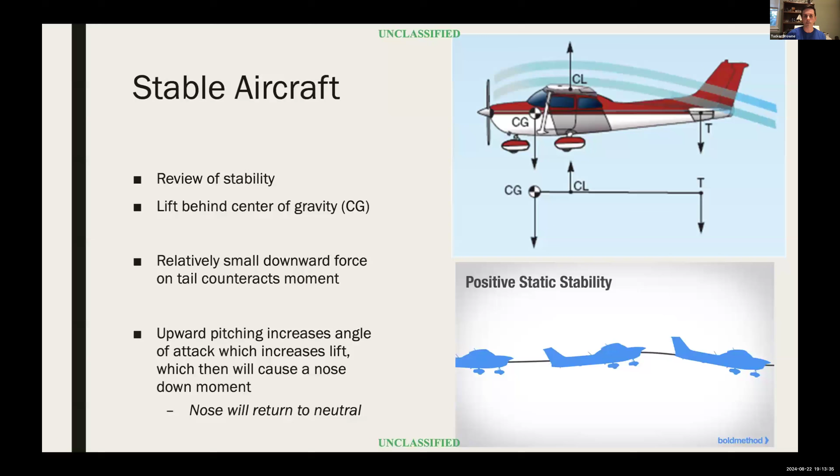That is not the case for a fighter. In most fighters, lift is forward of the center of gravity. So now when you increase the angle of attack, it increases lift and causes a further nose pitching up moment. It's unstable. So you have to have digital flight controls to counteract this to reduce pilot workload. If the pilot wasn't actively fighting this the whole time, and sometimes it's even impossible due to considerations like pilot-induced oscillations, the airplane just wouldn't be able to fly.

So the F-16 was one of the first unstable airplanes that was actually operationalized. An interesting tidbit: I often hear people say the F-16 was made unstable for maneuverability purposes. And while maneuverability does actually increase somewhat due to instability like this in pitch, it actually wasn't why it was first designed or implemented. It's because of the tail force.

And the thing that you'll notice that's different there is that as opposed to a stable aircraft where the tail force provides a down force to counteract lift, in an unstable aircraft, you can have the wings and the horizontal tails provide an upward force, which means now you have more ability to have lift, which increases performance because you need to fly at a lower angle of attack.

So initially it was made literally to increase the range of the F-16. They said, oh, this is actually really great for maneuverability too. But I didn't know that until I got to test pilot school. I always thought the F-16 was designed to be unstable. And then some of the original F-16 testers told me that. So I thought that was pretty interesting.

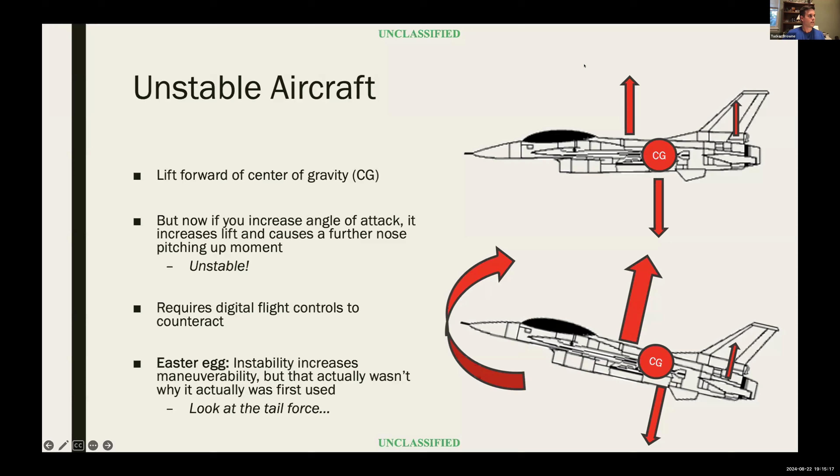So what you have to do when you have an unstable aircraft is you have to do some sort of fly-by-wire or digital flight control system. And essentially what that does is it gives you a flight control computer that talks to actuators to automatically actuate your control surfaces. So most advanced fighters, most of which are inherently unstable, which there's exceptions to that. For example, the F-15 is actually a stable aircraft. But for inherently unstable aircraft, they require flight control computers to make the workload reasonable.

So one of the things that happens there is it gets rid of feedback. So now I am just giving a vote to the computer as to what I want to do, but it allows for much quicker flight control responses, and it allows for some cool things in that now if I just pull back on the stick, it doesn't necessarily just directly connect to an elevator the way that it would in a Cessna or some sort of small pulley driven airplane. It can do a combination of different flight controls.

And also another misconception I had, at least coming into test pilot school, is that, hey, if an aircraft's unstable, that means it's uncontrollable, and that you'll just go out of control. There's no way for a pilot to fly an unstable airplane. One of the coolest things I got to do in test pilot school, I got to fly the X-62 VISTA, which is a specially designed F-16 that allows it to basically modify the flying qualities of aircraft. And I also got to fly in a specially modified Learjet run by Calspan that does that too.

And one of the things they did, they added a pitch instability into it. So now as the nose starts coming up, it actually keeps going up. And as the nose comes down, it keeps going down. And I thought this is going to be pretty difficult to fly. It turns out it just takes a fair amount of pilot workload. You can fly an unstable airplane, which I had no idea that you could control it.

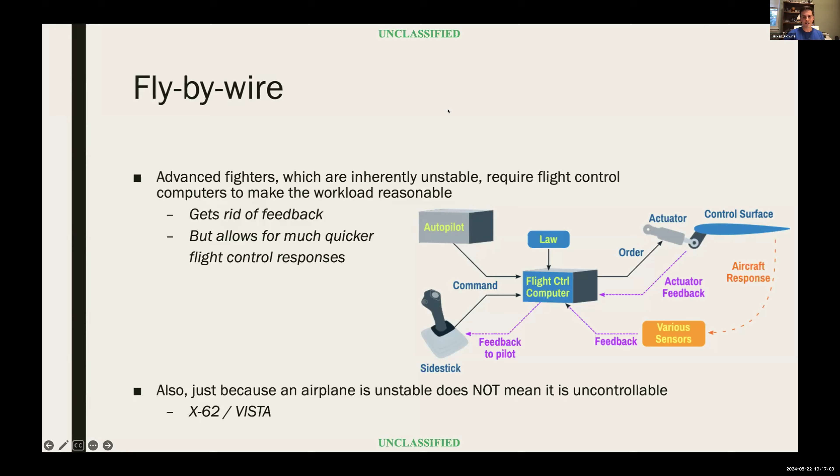But you can. So the traditional kind of flight controls in stable aircraft, sometimes you might see reversible flight controls, i.e. pulley sort of systems. So airplanes like Cessnas have these reversible flight controls where you move the stick and the flight controls move. You move the flight controls and actually the stick moves as well. That means you have to consider other factors into flying qualities and handling qualities, such as wind, speed, aircraft loading, buffet, because now you're going to feel those forces on your control stick and it's going to affect your ability to fly the aircraft.

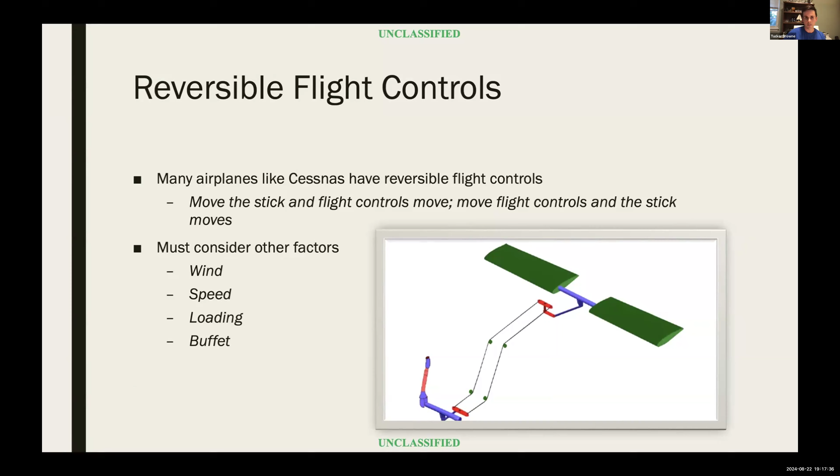So a couple differences between what we've seen here. So for some basic flight control differences, in a reversible flight control system that doesn't have a digital flight control computer, the faster you go, the more sensitive flight controls can be, and the higher control forces required. And that is okay for things that operate essentially from 50 knots up to maybe 150 knots, where the relative forces on the control surfaces are not that different. It's not okay when you're going Mach 2 or you're pulling 9 Gs.

And in those cases, you actually need the ability to have some sort of boost system in there, and irreversible flight controls help a lot. And the way that we do it in modern fighters nowadays are hydraulically assisted actuators. So the F-22 has a very, very strong hydraulic system with a ton of redundancy, because if this goes out, I can't control the flight controls. So we got 4,000 PSI hydraulics. So as a fighter pilot, if you just touch the stick on the ground, your flight controls, you'll have this giant flat slab of metal that moves around.

So every time you've got maintainers near you, you're always hands off, showing them that it's safe for them to walk around. People really get touchy about the fact that those things are so powerful. But that's what enables a lot of the actual pitching forces, rolling forces, and maneuverability that exists in these aircraft.

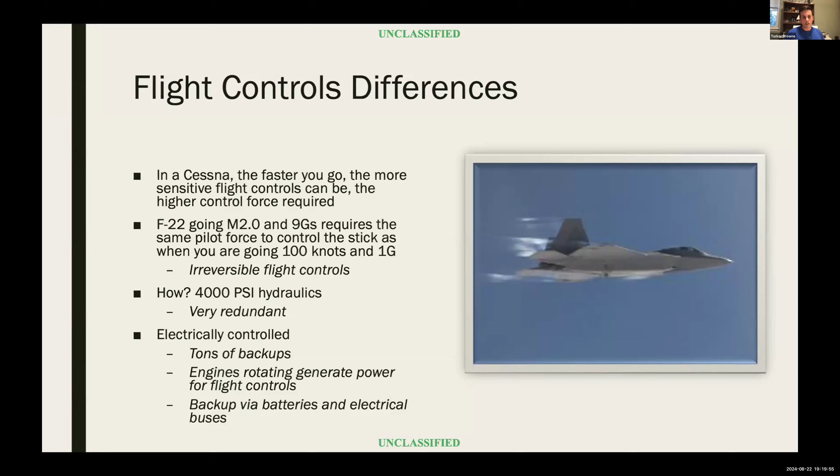So getting into the F-22 surfaces. Typical aircraft have elevators, ailerons, rudders, flaps, maybe speed brakes as well in some aircraft. The F-22 adds flaperons, which are similar to flaps, but can be used for roll control as well. It adds angled rudders, ruddervators per se.

Instead of the tails being straight up like they are on the F-15 or the F-16, they're canted on the F-22. That allows the actual rudders to provide pitching moments and rolling moments potentially, in addition to just yawing moments.

We added vectoring nozzles in the F-22, and it's the first operational fighter to employ those. And that is what makes the air shows so great, if you guys have ever seen them. It allows you to do things like high alpha loops. In a typical fighter, it might take 5,000 to 10,000 feet to do a loop. In an F-22, if you're trying to do a high alpha loop at slow speed, you can do it in 1,000 feet, which is pretty amazing.

And you can actually be entirely stalled and still get your nose back up. When I say stalled, I need to retract that a little bit. You can be past maximum coefficient of lift and still move your nose up. We don't actually talk about stall in the F-22 the way that you would in other aircraft, because the F-22 doesn't stall the way that other aircraft stall.

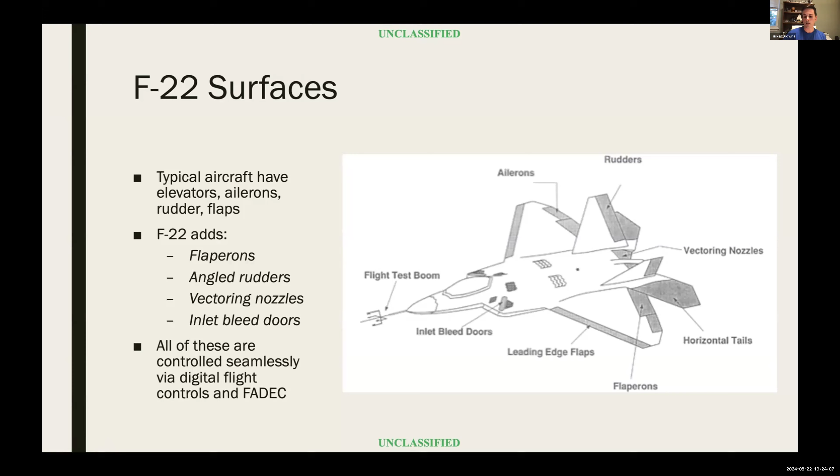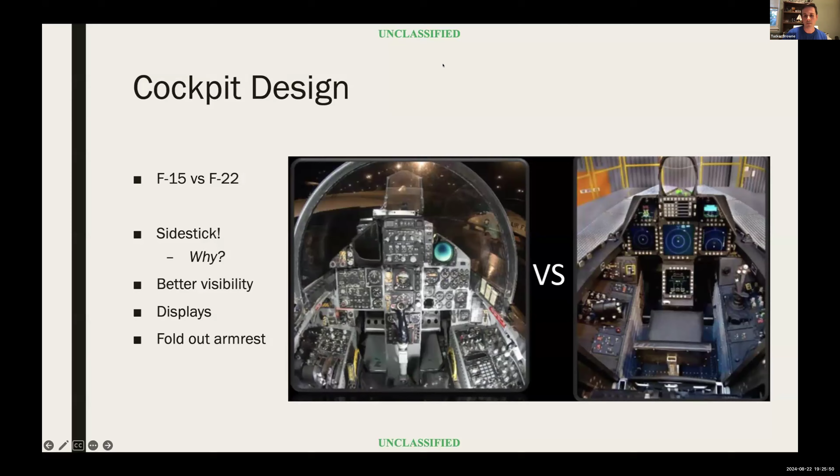So the side stick design, it originally actually didn't move at all. It was just a fixed stick that...

Oh, all right. Sorry about my dogs.

It was a fixed stick that was just a force sensor. So it was just a piece of metal that wouldn't move back or forward. It would just feel how much you're moving the stick. But it was problematic. Without any movement in the stick at all, it was really easy to pull the stick when you didn't want to or roll when you didn't mean to. I found this in the F-16 because I flew the F-16. The F-16 wasn't quite fixed, but it was much more fixed than the F-22 stick. Sometimes I'd be looking down, working on a task and thinking I'm flying the aircraft, and I wouldn't even notice that I'd be rolled 90 degrees to the left, which was pretty crazy.

So the F-22 got past that by adding in more realistic control forces. They made a compromise with the F-15 idea, where you can move the stick a lot and have good SA, or situational awareness, on where the stick is in relation to you, by adding in a 1/4 inch to a 1/2 inch in each direction. Additionally, they added a soft stop and a hard stop. You could pull back with about 25 pounds of force and hit a soft stop, and about 50 pounds of force takes you all the way back to the hard stop. And between each of those stops and levels of force, there are control laws, and they're not always linear.

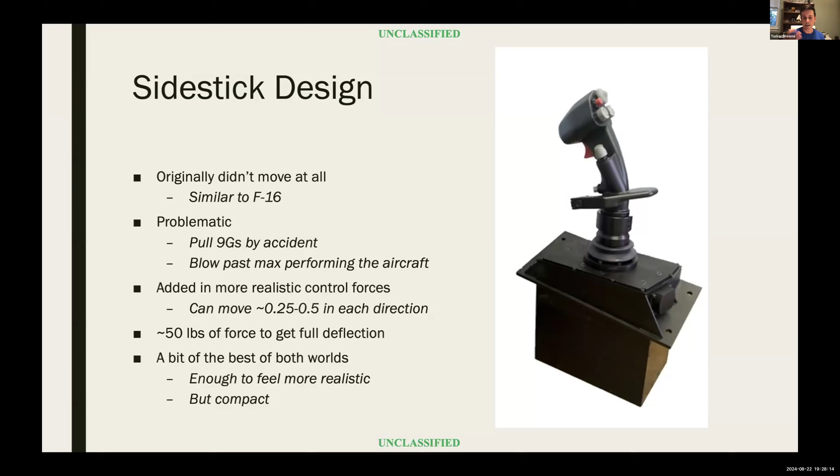And that actually was a pretty tough thing originally in the F-22 program, because moving from G command to pitch command as you slow down, for example, it could get a little bit disorienting. So they had to use a lot of very specific control laws and control law tailoring to make it seamless. And it really is. Like, you don't notice when the control laws change.

Another really interesting one is the yaw command. If you've been to the air shows, you might have seen them do these pedal turns where,

can you guys see me actually as well? Yes, we can. All right, perfect.

Where you would actually yaw the jet just around a point. So if you're going fast, actually all it commands is just a little bit of side slip. But as you get slow and you increase your angle of attack, it will command just the jet to rotate, which is pretty amazing. You can't get that yaw out of any other aircraft before the F-22.

The F-35 flight controls are actually pretty similar to the F-22's. So the jet knows the best way to get what's commanded. It combines flight controls and thrust. So I'm talking about that pedal turn that happens. So for the pedal turn, you get up to a high enough angle of attack and slow enough speed, you put in pedal to the right, we don't even call it rudder, and it starts this yawing moment.

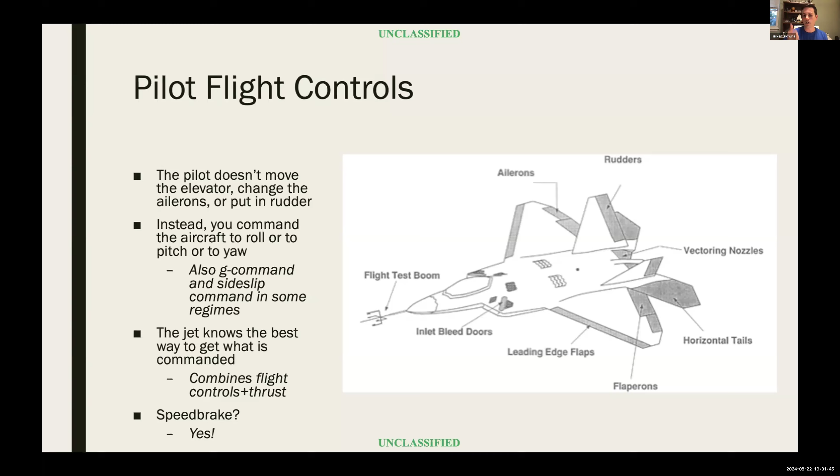Additionally, you might notice that there's no speed brake on the F-22, and that's true. And when you put out speed brakes, what it does, it just takes those rudders, puts them out in the wind, takes your ailerons, moves them up, takes your flaperons, moves them down. It just throws out whatever control surface it needs to put in there, but it doesn't provide any pitching moment, any rolling moment. It's just as if you put out a regular speed brake like you would in any other aircraft.

All right, got a question. Given all the aggressive angles, maneuvers, G-forces, and such the craft is put through, how is fuel flow maintained under any and all conditions? Yeah, so these engines are amazing is how. Thank you, Pratt & Whitney, for making the best engines that I know of.

I would say it is extremely impressive that the F-119 can operate essentially at 0 knots. It can operate at mil power and all the way to AB at 0 knots, which can be difficult. You can go from afterburner down to idle power without risk of compressor stall or flame out. And the way it does that is through a very effective FADEC, or digital engine control. Can't remember what the FA stands for, but the digital engine control will keep you safe, essentially.

So for example, if I'm really slow and I try to pull the throttles all the way back to idle, it might not let me do that. I might command idle, and it might just keep the throttles up at near mil power. Or if I'm really, really fast and supersonic, it might do the same thing. As I'm pulling the throttles back, to avoid any issues decelerating from supersonic speeds, it will just maintain a minimum RPM or minimum fuel flow rate. We have a great fuel pump on the airplane, and essentially it's a FADEC that is just as well designed as the flight controls that enables the engines to be really effective.

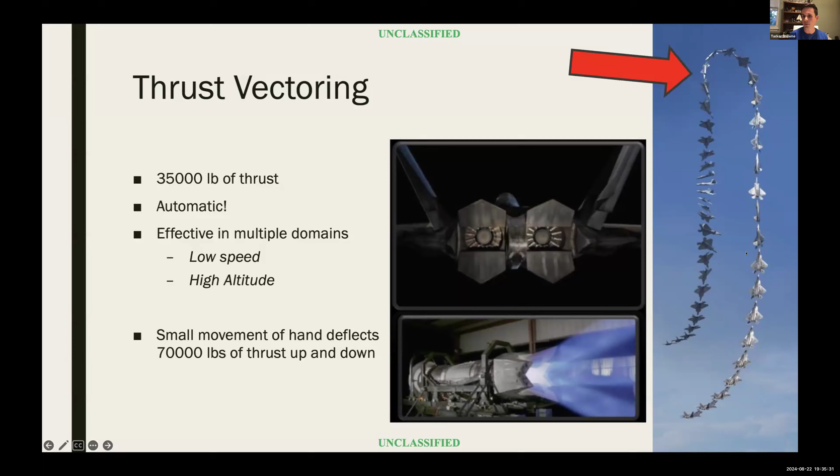So that's the low speed use case. You get really slow, or you're doing some sort of vertical maneuvering and you need to move your nose, the thrust vectoring is what will continue the pitch movement. And then high altitude, there's some usage for thrust vectoring, which I didn't think of before I got into the jet. When you're up at 50,000+ feet, the atmosphere is pretty thin. So even just having the ability to kick the nose up a little bit using thrust vectoring is really helpful to fly comfortably up there. So it automatically kicks in up there, and that is a really cool capability.

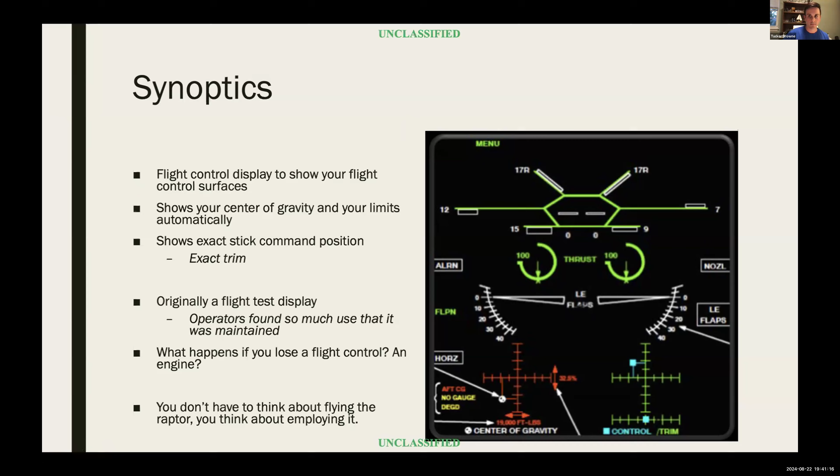Okay, so a few more things about the flight control. On takeoff, the flight control system has very smart mode switching. So you can imagine that the flight control gains and maybe even the flight control modes at different phases of flight should be different. Takeoff and landing are actually very similar. Weight on wheels means you're in takeoff mode. If your gear are just down and you're below a certain airspeed, you're in landing mode.

So on takeoff, your rudders will actually both toe inwards, which is a little bit weird, but it actually causes the nose to pitch up. The ailerons will move down slightly. The flaperons will extend. The leading edge flaps will also move down to create a lot of camber and essentially give you flaps that you would have in another aircraft. The takeoff occurs at about 150 knots, or if you're in afterburner, a little bit faster than that. And it's really seamless switching up to cruise and going gear up.

On your landing mode, the pilot does nothing. As soon as you're weight on wheels, it'll bring both your ailerons up. It'll bring both your flaperons up. It'll bring your leading edge flap back to nominal to kill the lift. Additionally, it'll deflect the rudders anti-symmetrically. And then the brake system is extremely effective in this airplane, which allows for very quick stopping.

Sometimes too quick. I remember I landed heavy out in the desert one day on a hot day. Didn't realize how much fuel I had and wanted to stop. And the jet let me stop, and my tires caught on fire, which I got made fun of for quite a while. So don't do that.

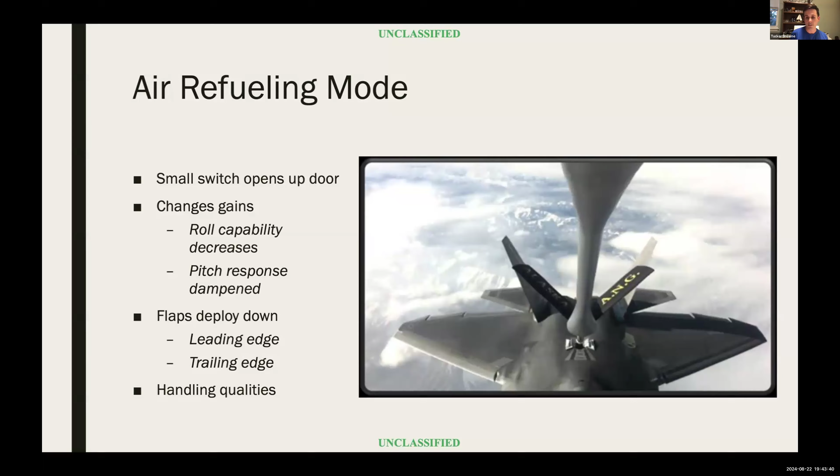So what's it like to fly overall? It's hard to describe, but I find myself extremely lucky to be somebody that is alive at this time in history to be able to fly the F-22, because they're not making airplanes for maneuverability anymore based on these long-range kill chains that are maybe coming out. And they're not, in some cases, making airplanes with pilots in them anymore. So if any of you guys are working on that, boo. Not really. That's actually a great capability. But flying the F-22 is a real privilege.

Captain Don Van Dyke: given the small cockpit real estate required, why not make the throttle quadrant and flight stick left, right, plug and play, depending on pilot preference? Yeah, fair enough. I'm lucky to be right-handed is all I can say on that one, because I don't know how left-handed people end up having to fly this aircraft with their right hand. The difficulty is there is a lot of electronics that goes into those hands-on throttles and sticks. So it's just difficult to move things back and forth. It could be designed in theory, but that would increase cost and potentially weight. So they decided not to do it.

And all my left-handed friends figure it out. So I guess it works okay.

So my favorite experience in the Raptor is always doing an afterburner takeoff. An afterburner takeoff, you just hold the brakes, you start bringing the throttles up. You actually can't hold the brakes while at mil power. You'll start skidding along the ground. So you have to let off the brakes while you're pushing into AB. Your afterburners light in just a couple seconds. And then you have to rotate at like 100 knots and you're off the ground at about 140. And all that takes maybe about 4 or 5 seconds.

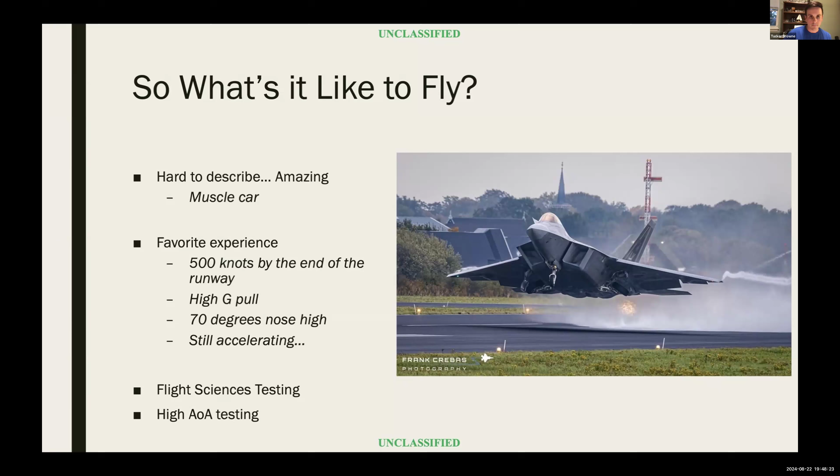So if you guys aren't familiar, I'll just give you a little bit more insight into how we test handling qualities. There's this thing called the Cooper-Harper scale. So it turns out that a lot of handling qualities testing is qualitative. You can do a lot of tests for things like dynamic pitch response or dynamic stability or static stability. You can run numbers for it and you can get coefficients. And those will tell you generally, maybe this will work right. And you can run them in simulators even. And we do.

Every single test flight we did, because it costs $100,000 an hour to fly a test F-22, we simulated once or twice to make sure we were not going to waste anybody's time or waste taxpayer money, basically. But you can figure out what these numbers are and fly the simulator. But in reality, it comes down to, did the pilot like it? So those are things like flying qualities.

Flying qualities tell you, is there just a major problem? Is something actually unstable when it should be stable? Or is there just some coefficient that is way off? Handling qualities, which is really the realm of the test pilot when it comes to some of these tests of suitability, get into, is it suitable or is it actually safe to fly?

So essentially we start in the bottom left. The pilot will initially just go, hey, I tried to do this maneuver. During this maneuver, was it controllable? Yes, no. If it's no, that's called a Cooper-Harper 10. It means control will be lost during some portion of the required operation. I've only ever seen that in simulations. That is never flown. If you see a simulation with the Cooper-Harper rating near there, they're never going to put that on a real airplane, and that person might not come back to talk about it.

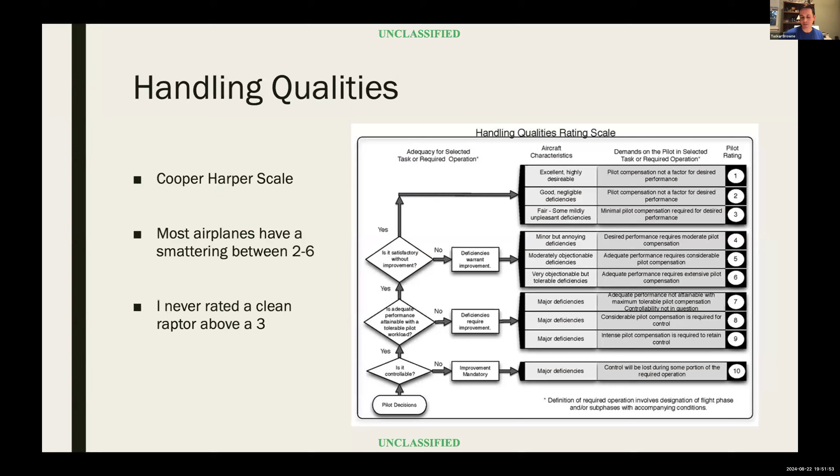I just want to jump in for a second on that slide. Bob Harper in Cooper-Harper was the chief test pilot at Calspan right here in the heart of the Niagara Frontier section. Passed away a number of years ago. Great guy. Absolutely. We have some real expertise up in that region when it comes to flying qualities.

But before we do that, Steven asked, with the weapons on the F-22 internal, have you seen a lot of handling issues with other fighters with external stores? Yeah, absolutely. Actually, one of the nice things about the F-22 is that you don't have to do as much testing with external stores. External stores, like on the F-16, when you get asymmetric loadings, i.e. maybe you have a fuel tank and a bomb on one side, and on the other side is just a fuel tank.

Now you have to think about roll stability, lateral stability, susceptibility to out of control that you don't have to think about in an airplane like this. And the handling qualities on airplanes that have external stores, those almost all require some amount of trim, and it changes with airspeed and with loading.

So that's one of the things that probably made the problem easier for the F-22, to be honest. Because you're right. Things like the F-16, you have to program in every combination of different stores, or you have to have a flight computer that's smart enough to be able to account for them appropriately.

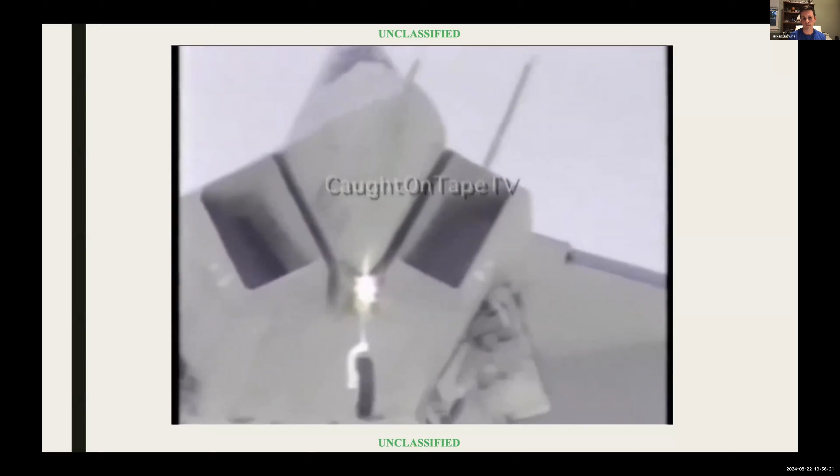We're coming in for approach, low approach. Gear's up, afterburner's on. Pilot was fine. The jet was not so much.

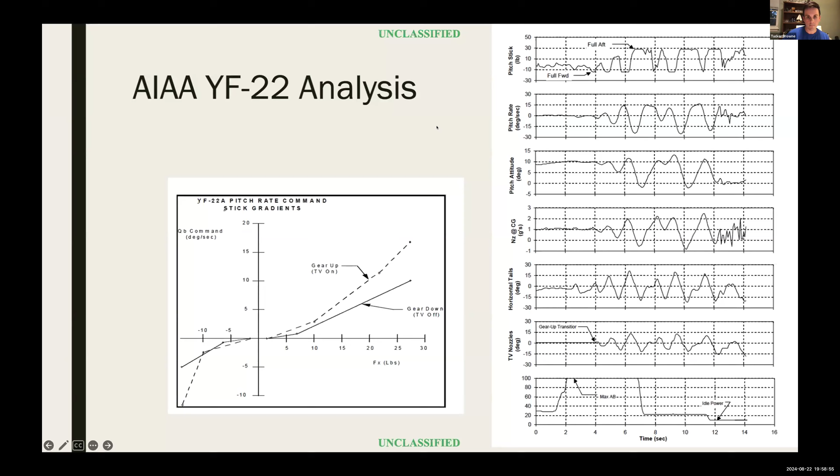Okay, Justin Kirk asked a question that I was going to get to now. How would the aircraft get out of longitudinal CG given limited stores and automatic fuel management? So all the way from the full fuel loading of 18,000 pounds, all the way down to what you're supposed to land with, which is greater than 2,500 pounds, your jet has fuel bladders spread throughout the jet sufficiently that it can maintain the CG in a good range, no matter what the loading is.

So if it did have some sort of trapped fuel, because that's really what would cause it. Actually even a hung store would most likely not do it, because they would automatically change the fuel. But if you had trapped fuel in one position, then you would basically come back with your CG out of limits, and you would just have to do whatever is appropriate for an aft CG or forward CG.

But the fuel pumps are extremely good. They can move it from, basically not every single fuel tank, but quite a few fuel tanks to other fuel tanks. And we suck out all the gas, which is great. It's just a really good system that is really good at maintaining longitudinal stability.

Richard McKercher asks, what does the process of tuning the control law gains for the various flight configurations and conditions look like from the test pilot's perspective? And maybe from the FTE's perspective. So yeah, that's a good question. So the F-22 currently is going through some major modifications where we're doing some flight control gains testing. And essentially that process is a build-up approach.

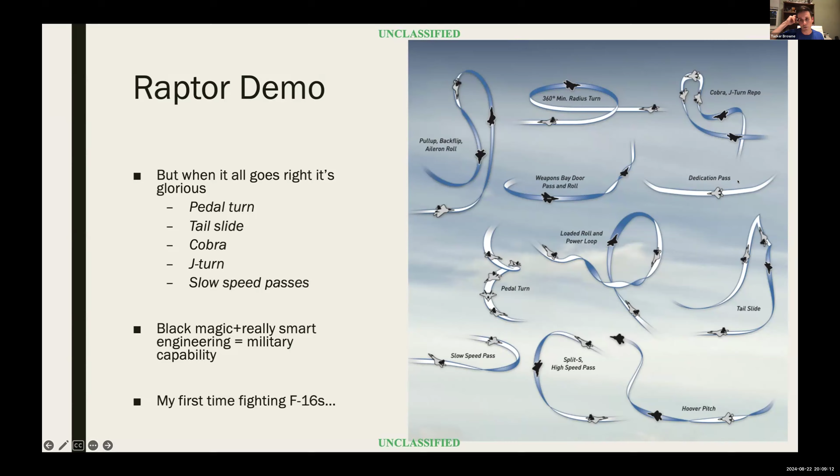Whereas in the F-22, you can take your hands off the control, look down at your displays, shoot some people, play your video game of beyond visual range combat, look up and the airplane is still going to be flying perfectly fine. But that's a really cool story about the Spitfire. I didn't know that.

All right, biggest takeaways. We're getting towards the end. Reckless abandon is actually nearly possible, even in a high alpha 9G fighter, which is pretty cool because this thing has a giant envelope in place that it can be employed in. And I, as a pilot, barely have to worry about it, which is really amazing. Advanced fly-by-wire generates unheard of maneuverability and the capability to do things like the F-22 demo shows you, which other airplanes just straight up could not do.

Now as other airplanes are getting advanced fly-by-wire, you're going to see it, but the F-22 will still have some advantages in that it's got just a really great thrust to weight ratio, and it was designed for dogfighting. Carefully tuning the cockpit stick and flight controls improves handling qualities, and the handling quality is what it actually really comes down to. Is, hey, does the pilot find this acceptable without improvement? And if that's the case, then we're good to go. Or if it's not the case, maybe we need to think about changing something.

And then a wide envelope with a lot of different modes, such as landing, takeoff, air refueling, cruise, high alpha flight, high G flight, supersonic flight. It requires wide consideration of variables. And you have to have some really smart engineers to make an airplane fly the way the F-22 flies. What it really comes down to is reducing pilot workload, which helps pilots complete other tasks, which makes the F-22 the most effective air dominance platform. All right, guys, that's what I got for F-22 flight controls. Open it up for any other questions.